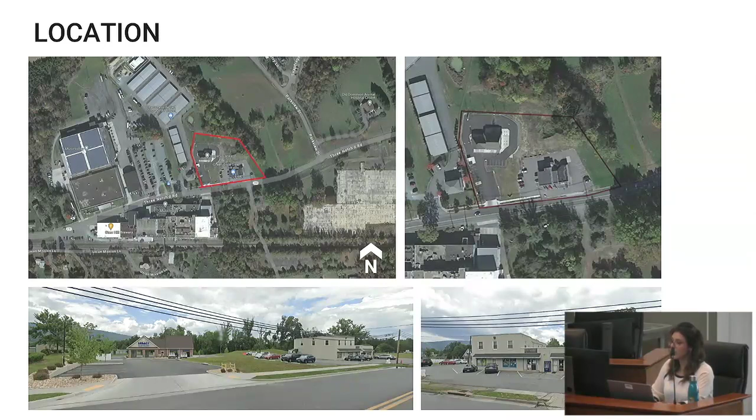Recommendations from that meeting included submitting a minor site plan amendment to coordinate the site plan with updated building design and other proposed site changes, which the applicant has now done. The proposal is largely consistent with what was reviewed during the February 5th meeting. Slight changes have been made to refine the footprint and design of the multi-tenant building and provide more detail on associated site changes such as parking, landscaping, and lighting.

Renderings provided to the right show the proposed design. The new building will be approximately 22,000 square feet, which is a correction to the staff report. Overall, it's a slight reduction to the square footage. There will be 16,500 square feet available on the first floor and 5,500 square feet available on upper floors. I should say that the renderings provided here include two additional trees that are not actually on the site plan along the front of the building.

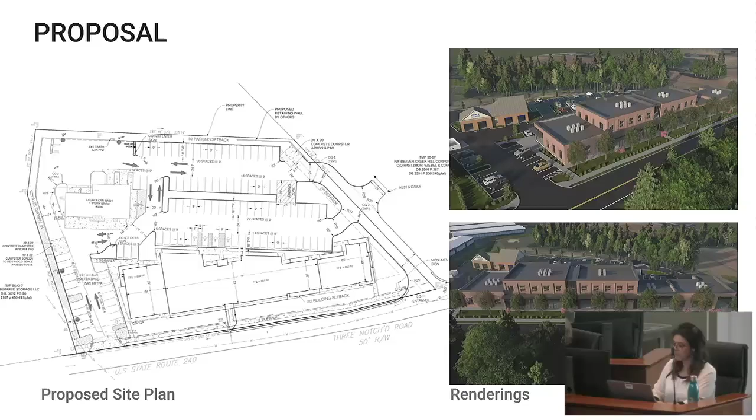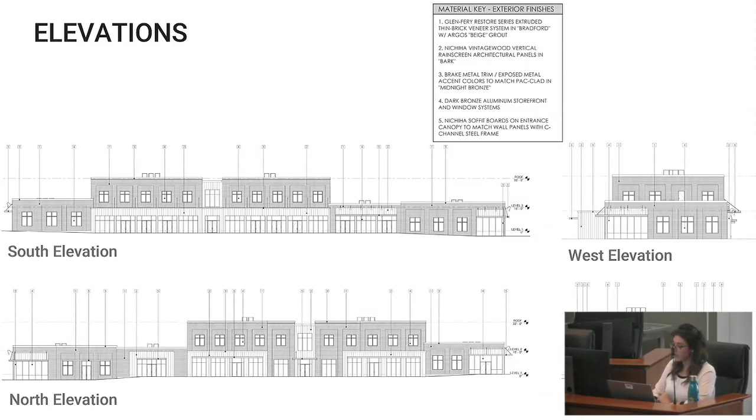Elevations show that the proposed design remains consistent with the historic structures nearby and within the county, and is also compatible with the industrial character of the surrounding area. The use of articulated rectangular forms, 1 to 2 story building heights, and proposed materials promote a coordinated and attractive appearance along the corridor. Changes to the design include replacing transom windows located above the canopies with siding that is coordinated with other proposed materials. However, new angled exterior lights are shown in these locations.

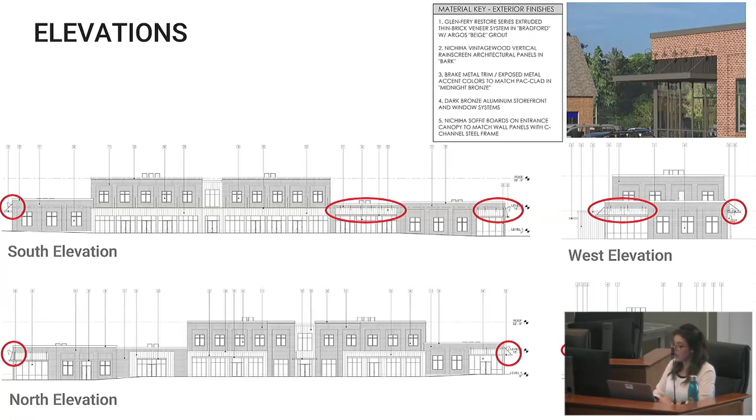The locations for the lights imply that they may be used as external lighting for future signs, but more information is needed to assess whether these lights meet the guidelines, including an updated photometric plan, what they are illuminating, and a comprehensive sign plan. Issues in the landscaping plan were also identified in the staff report.

Recommendations include meeting the tree caliper size requirements for street trees, interior roads, and around parking areas. There are also recommendations concerning existing trees that will remain on site. There are existing trees that need to be included in the plan, and more information is needed about whether these trees will be retained, as some of their locations conflict with new plantings.

Other issues identified in the staff report include providing details for window glass, revising minimum light levels so they do not exceed 20-foot candles, confirming that roof line or rooftop equipment will not be visible from any vantage point along the Route 240 entrance corridor, including a detail for the dumpster pad on the site plan, revising notes and labels, and meeting grading requirements.

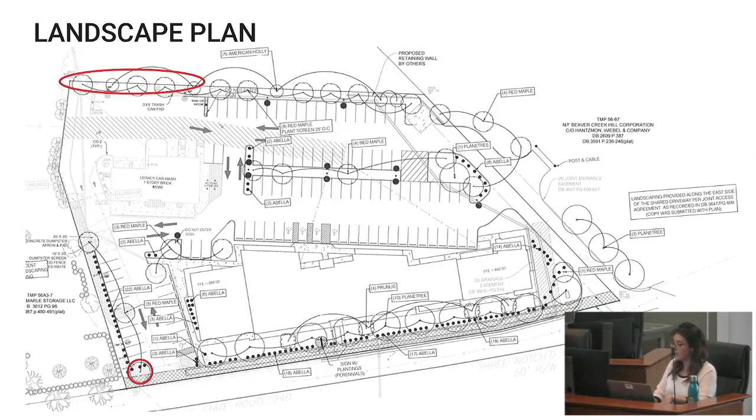Lastly, after the staff report was written, we heard from the applicant that they would like to make a change to the proposed brick and grout material. A sample of the new brick has been provided and is behind you. Overall, the new brick and grout are similar to those previously proposed. The new material remains consistent with the historic and local character of the area and promotes an attractive appearance along the corridor.

Staff is recommending approval with conditions. The full set of recommendations and discussion topics are provided here. I have a slide with a list of possible ARB motions should a member of the board like to have them on hand. Otherwise, this concludes staff's presentation.

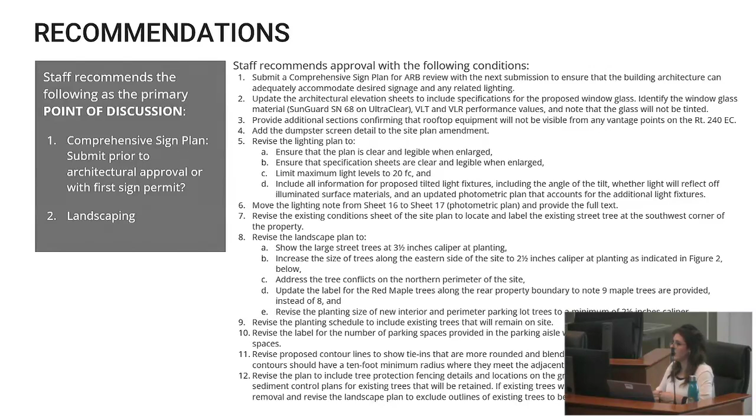Are there any questions about the staff report or presentation I can clarify? All right, thanks a lot.

Dave, do you have any questions? Thank you, I don't have any questions. Tara? Thanks, Mariah, I appreciate your presentation.

I was just wondering, is there a typo on number 8A? Is it 3.5 inches or 2.5 inches? Street trees are 3.5; interior trees along interior roads and the perimeter of parking areas are 2.5. Okay, great, thanks. Then appreciate your presentation, the correction.

Frank? I don't have any questions. Thank you, thanks for your presentation. I don't have any questions either.

So if the applicant has a presentation, now would be the time for that.

Good afternoon, my name is Kevin Schaefer. I'm with Design Develop here in Charlottesville, Virginia. Thank you so much, Mariah, for the thorough staff report and that introduction.

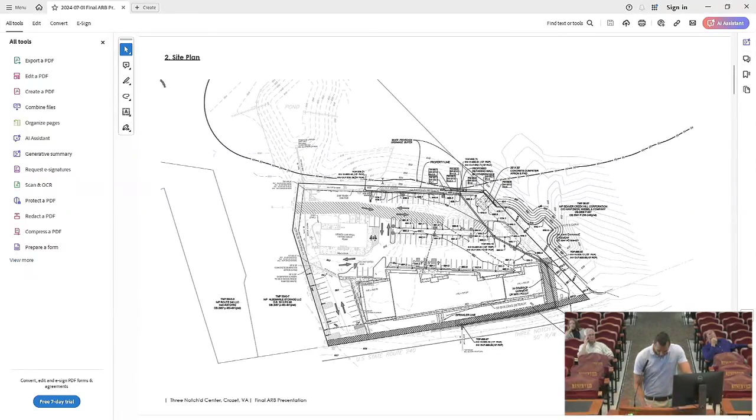I'm just going to address the recommendations and the conditions that staff have proposed in this staff report. Regarding the site plan considerations, I'm sorry, I forgot my sheet that I printed out, so I have to look down at my phone. I'm actually going to skip the comprehensive sign plan discussion and follow that up at the very end.

I think that's probably where we warrant the most discussion. We are very sympathetic and understanding of that comment and that recommendation to submit a comprehensive sign plan for ARB review with the next submission. Just want to understand that process a little bit more and have that discussion.

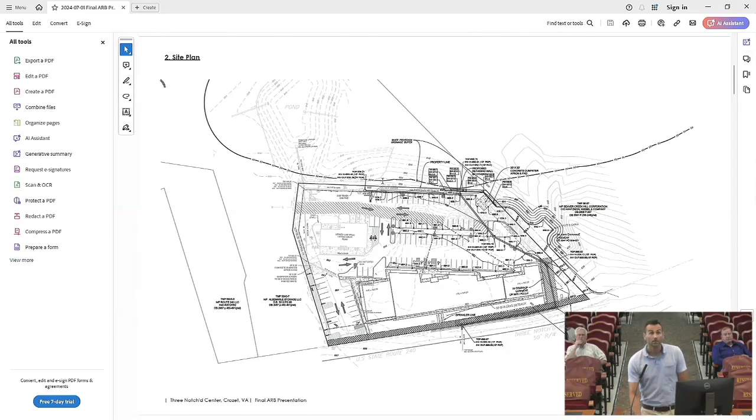Regarding the building sections, providing the building sections, which is item number 3, we have supplied those here on this slide, cutting the building sections in a number of different locations to show that we really don't believe the mechanical equipment will ever be visible, for a couple of reasons.

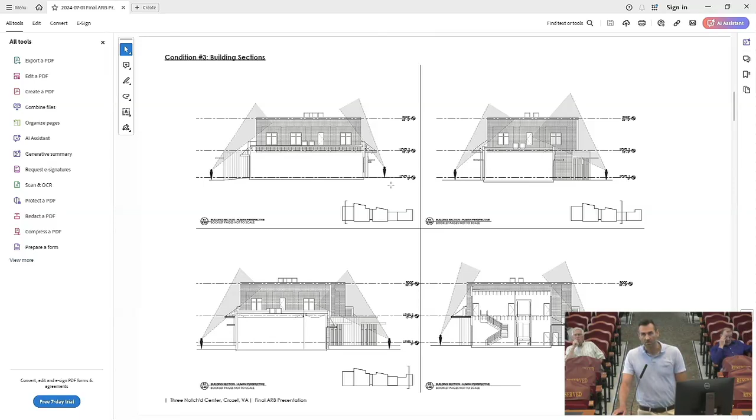And then the third is we do have varying parapet heights along the elevation, the minimum being about 30 inches, the maximum being up to about 4 feet. So with that in mind, we really feel like the visibility of this mechanical equipment would be screened from all vehicular and pedestrian perspectives.

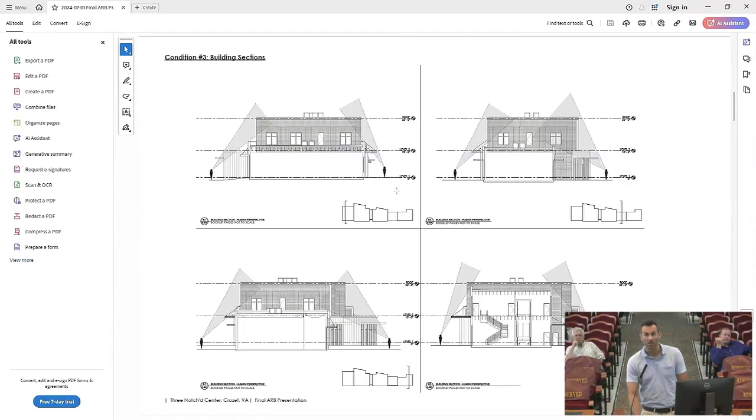But we are happy to provide these additional sections and more so if needed in our next submission. The dumpster pad, I have talked with Roudabush, who is our civil engineer on this site, and they will include this enclosure screening detail, which is condition 4. That's certainly not a problem.

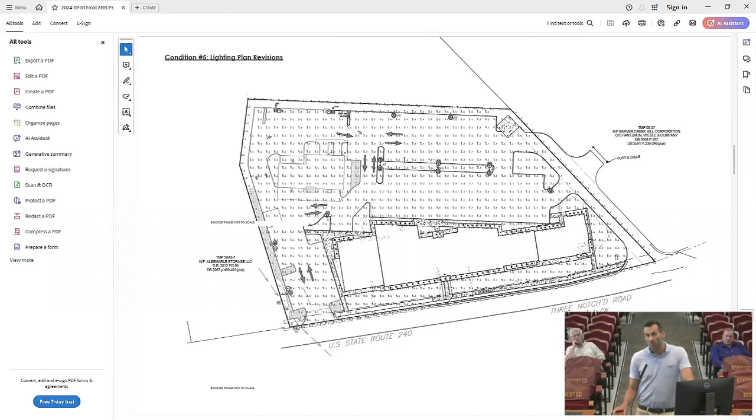Regarding the lighting plan, on condition 5A and 5B, I think there may have just been a linking or reference issue when we hit the plot button. We do have a PDF from our lighting consultant that is legible when printed full scale, so we are happy to provide that. We do need to make adjustments with the 20-foot candles, which we're happy to do, primarily through the reduction of those canopy can lights.

One thing I did want to talk about is we did run the photometrics with the gooseneck lighting as it's shown on the elevation. Those gooseneck locations happen where there is always a canopy. They are angled at the face of the building, and they did not influence the photometric plan, which I was surprised about.

So I called the lighting consultant and confirmed that that was indeed the case, and he said that it was, but we will provide clarity on that fixture, on the angle as requested by staff, and show maybe photometrics in some way from the top of the canopy or something if that is desired.

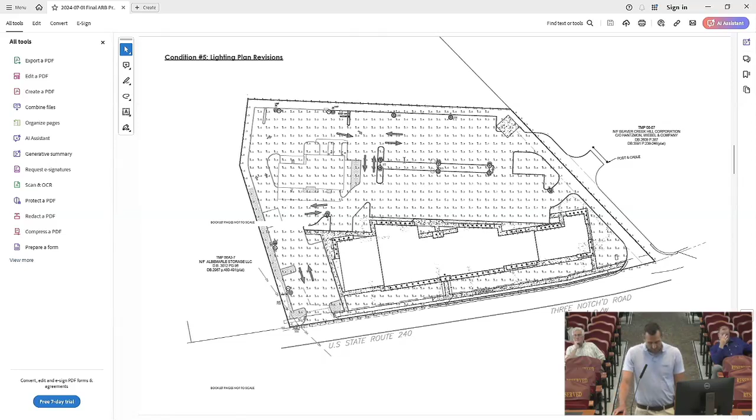Regarding item 6, we'll move the lighting note as requested from sheet 16 to 17 and provide the full text. Again, in coordination with Roudabush, we will revise the existing condition sheet to show that existing tree in the southwest corner, it's currently shown as new here. I believe that was the area that Mariah identified.

We were on item 8. Adjusting the calipers of the planting for the street trees is no problem and will be accommodated. So that is A. B, same response. We will address those.

For 8C, we were looking for a little bit of clarity, but I think staff may have just provided it. The area of concern is existing trees here, is that correct? Okay, so we'll make sure that those existing trees and those new trees are coordinated. We weren't sure if maybe there was a conflict with a utility that we weren't aware of or something like that.

We will happily address item D as well, 8D regarding the number of maple trees, as well as 8E as discussed. Item 9, a similar response, as well as item 10, happy to address those comments.

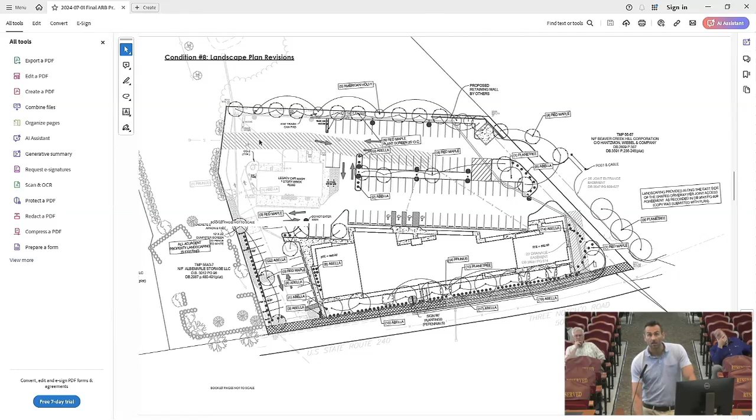Regarding item 11, and the contour line discussion, our civil engineer did request a little bit more clarity on the 10-foot minimum radius, where that was found in our ordinance and what the intention was there. Understanding that the idea is to make it blend in with the existing conditions, but just wanted a little more guidance on what the intent was there.

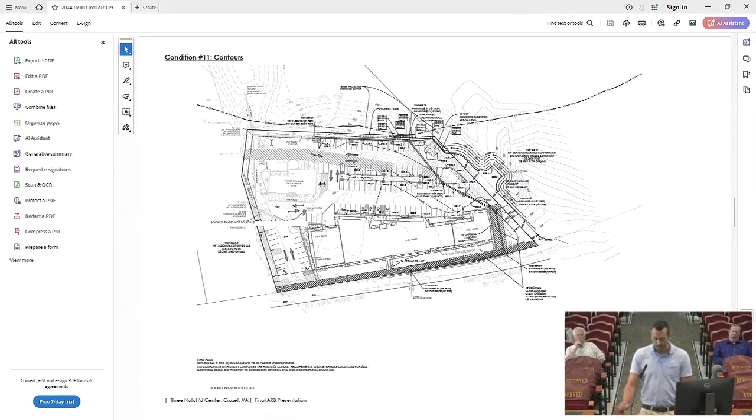And then item 12, we're happy to accommodate too, providing tree protection on the existing trees as noted. So with all that in mind, and I apologize, this is a little challenging to read here. Let's see if we can zoom in.

The comprehensive sign plan discussion was something that I touched base with county staff on, regarding the Hydraulic and Georgetown application as well as the Ivy property, and this in lieu of that, as kind of the next step of that discussion. And I do understand the request because it does get challenging to have a separate CSP hearing.

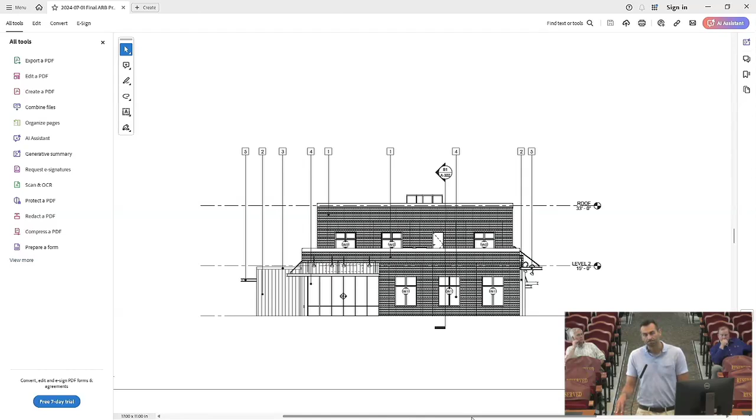We talked with the building owners at this time, and there's an idea of where signs are going to go based on tenant locations, but until there's a better understanding of the tenant, they were hesitant to put forth a true CSP until maybe permit review is completed and things like that.

So we offered up some sign locations, and county staff is correct in that the gooseneck lights indicate where we intend to have these sign locations. These show areas where previously there was clerestory glazing that was going to be impractical for a number of reasons, structure and mechanical units in the way. We were looking at spandrel glass up there, additional cost, and the limited functionality of spandrel glass above the canopy pushed us towards making these sign locations.

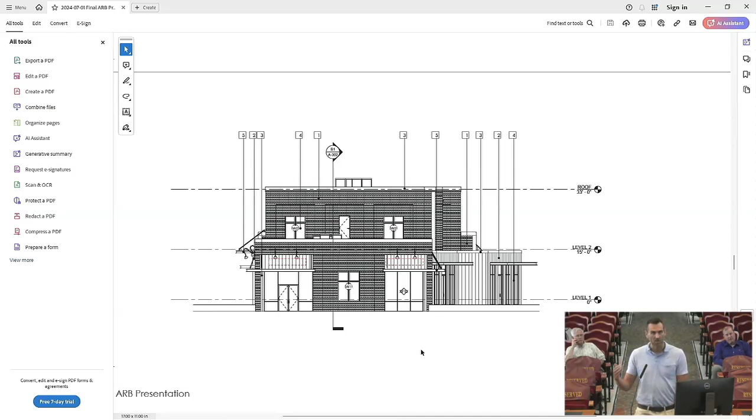The owner really likes the cohesive look of the project on 250 next to the market, and it's an antique store—I don't know the name of that—but that signage plan was where they said, can we start to take some cues from this, where it's a very cohesive and thoughtful signage plan with gooseneck lighting, as well as some standard channel letters on a separate material. So that's what started to drive this discussion, but we weren't quite ready to put forth a CSP that was completely ironed out.

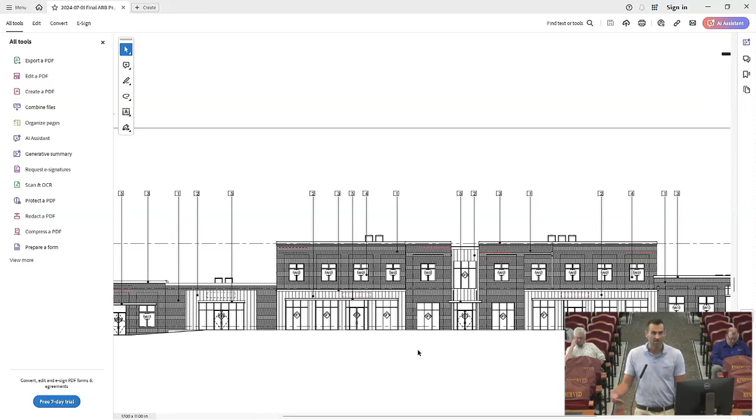But we wanted to get that gooseneck lighting in front of the board for their review. So, a long backstory on where we are on the CSP. What we'd like to request is that it comes back to you at a later date, not necessarily holding up this application. By showing these locations—I understand they're a little challenging to read on the screen—maybe this could be enough information to understand the thought process and where we were thinking. Essentially, it's centered above entrances and on the corners of the buildings, a similar approach to some of the other CSPs we've put forth.

This was just to show the gooseneck location with signs here, as well as on this corner here. So with that, I'll conclude the presentation and say thank you again for the staff report. Here to answer any questions, and would appreciate the dialogue on the best process, the best path forward on the comprehensive sign plan comment.

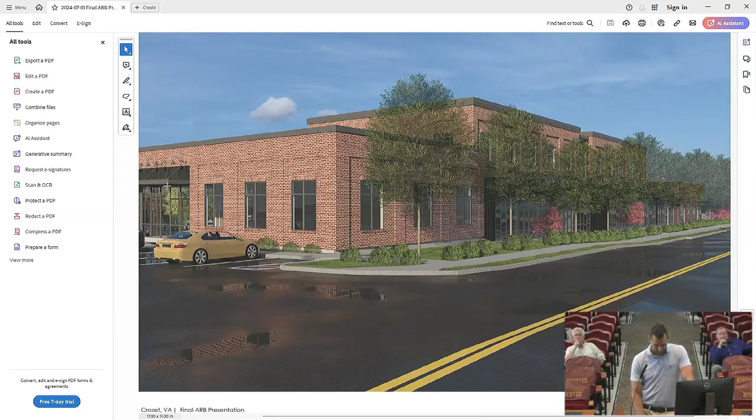All right, thanks for that presentation. Dave, do you have any questions for the applicant? Not for the applicant, but maybe a question for staff: is the comprehensive sign plan normally required with the final or ahead of it?

We usually recommend that the comprehensive sign plan is done before the final architecture is approved, to make sure there is sufficient space for the signs on the building. It also makes review and approval of individual sign applications more efficient. If we wait until the first sign application is made, that application is going to sit for at least 6 weeks until the comprehensive sign plan gets to the ARB for review. In this case, you've seen that there are locations set, and it looks like there's enough space for the signs, so it's really up to you whether you're comfortable waiting until later, after the architecture is approved.

I guess just one question about the sign location shown at the corners of the building—I don't know if you can pull that slide up. Couldn't quite tell, so they are pushed all the way to the corner. Would it be acceptable to perhaps justify them over the apparent bay and the brick below? Yeah, absolutely. Okay, thank you, that was the only question I had.

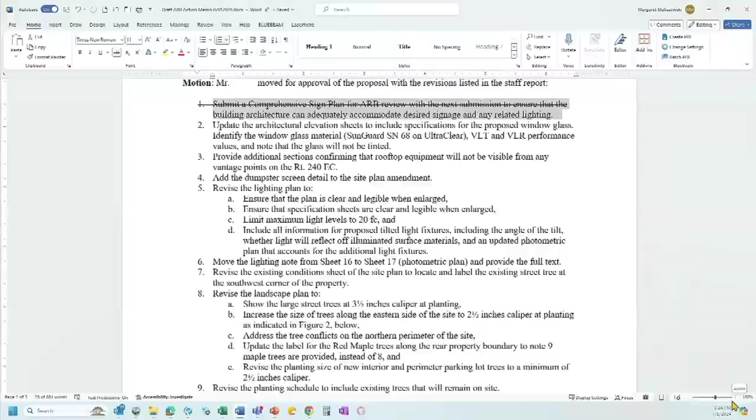I guess I'll just run through and see if anyone has any particular comments they'd like to revisit or look at. Dave, do you have any? No revisions for me. Tara?

I guess the only one I had a thought on, now that I'm going back, is number 3. We saw the sections from the pedestrian perspective. I don't have a strong degree of concern, but I'm trying to remember what the vehicle experience on the entrance corridor is like over there. I don't think there's a lot of grade change.

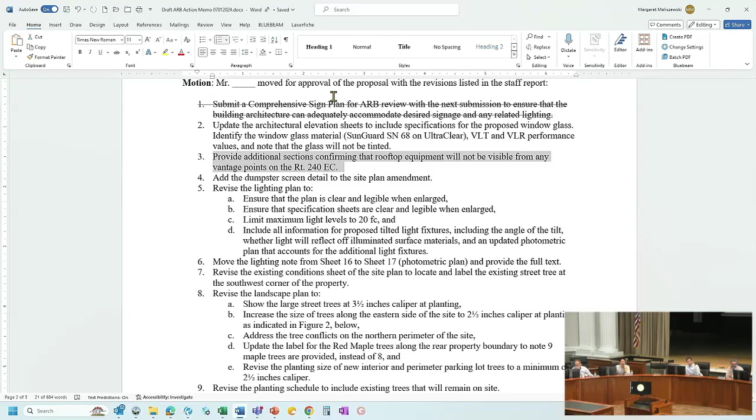Was a section provided in their materials that showed it from a greater distance for the rooftop equipment? No, the renderings provide somewhat of a distance to view, but you can't see rooftop equipment in those, and I'm not sure what their process for rendering was, if it would have included them or not in those particular renderings.

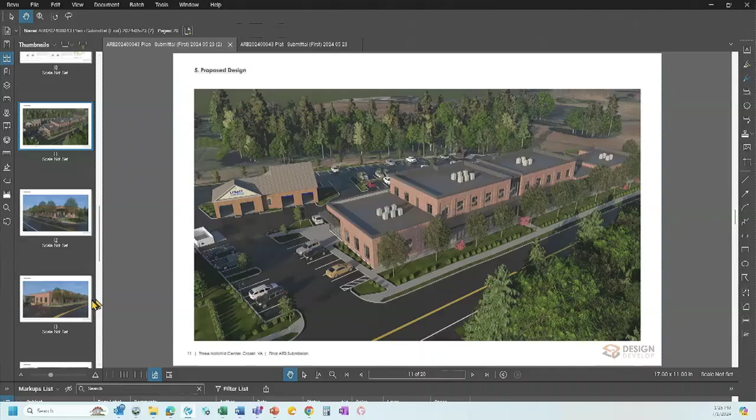Would it be possible to just provide them at a height that reflects a distance, kind of a little further up the road, just to verify?

We can provide that. To answer the question, the mechanical units are on in all of the renderings. We don't do it with the aerial on and then turn them off and re-export or anything like that. So just wanted to provide that clarity.

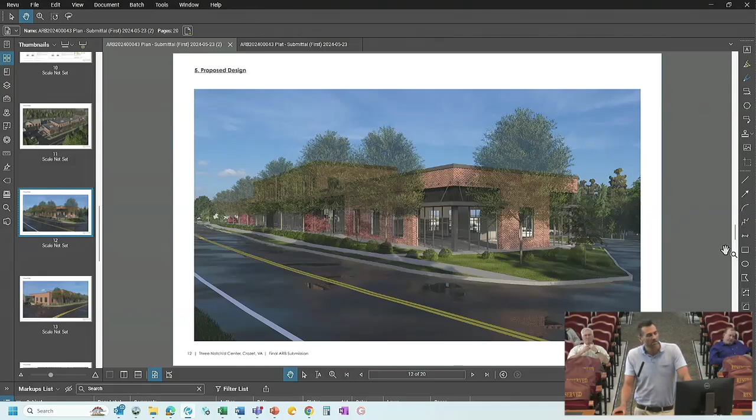The elevation is relatively flat along this stretch of road. It may rise slightly to the west and fall to the east. But we're happy to provide those additional renderings, and we're confident it will not be visible. Thank you.

Frank? I don't have any edits. Looks good. I don't either.

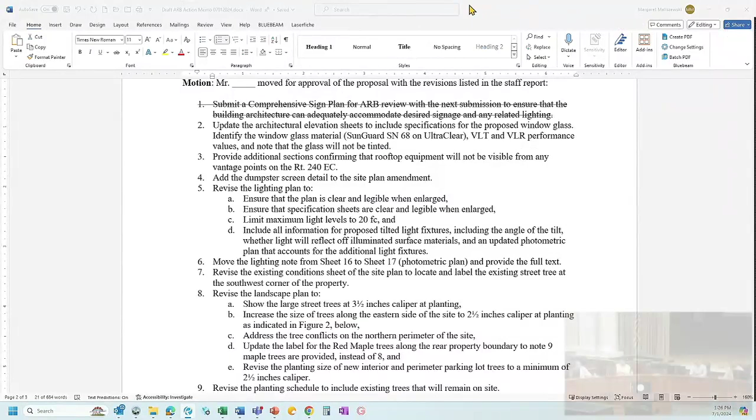Does anyone want to make a motion? Sure, yeah. I'd like to move to approve the proposal with the revisions listed in the staff report amended as follows: to strike item 1, to submit a comprehensive sign plan for ARB review with the next submission. All right, thanks, I'll second that.

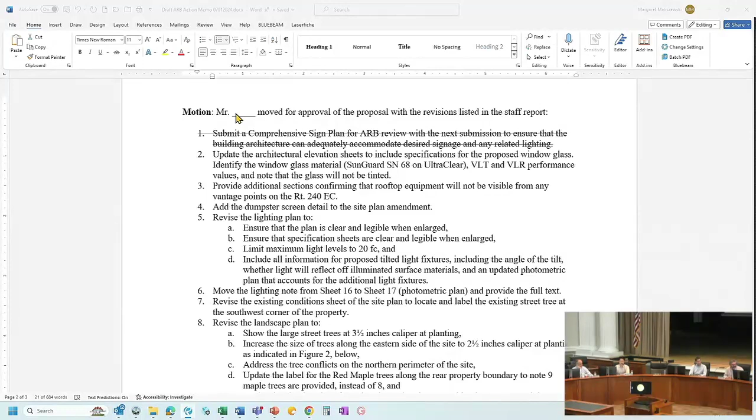I guess we could just put it to a vote. Mr. Henningsen, aye. Mr. Hancock, aye. Mr. Mitsuno, aye. Mr. Vanderwerf, aye. Thank you, all right, thanks a lot.